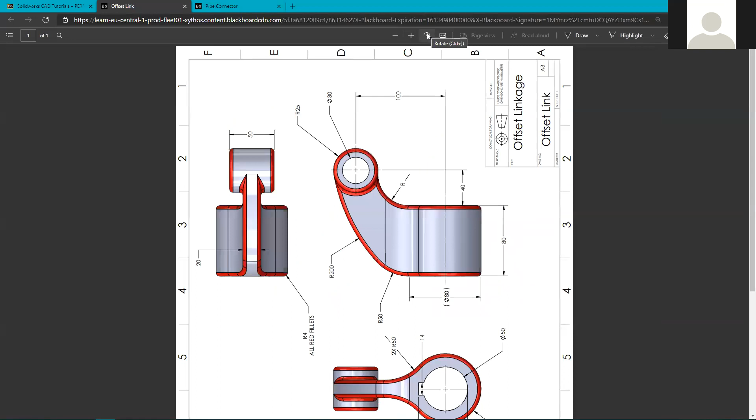So what that will include is coming up with our own specific title block as well. So you can see down here, we've got the title block of this drawing. This is a non-standard title block. It just contains the information that we're particularly interested in for this drawing. So the way that that gets created is you load in one of the SolidWorks standard title blocks and then you modify that and adapt it to your own purposes.

So that's a good skill to be able to have, because you don't want to be locked into just using the standard SolidWorks formats all the time. Sometimes the title blocks that you get in the SolidWorks standard sheets are way too big and they take up a lot of space on your sheet that can be used for drawing views and annotations and things like that. The second part that we're going to tackle, I haven't actually adjusted the title block on this one.

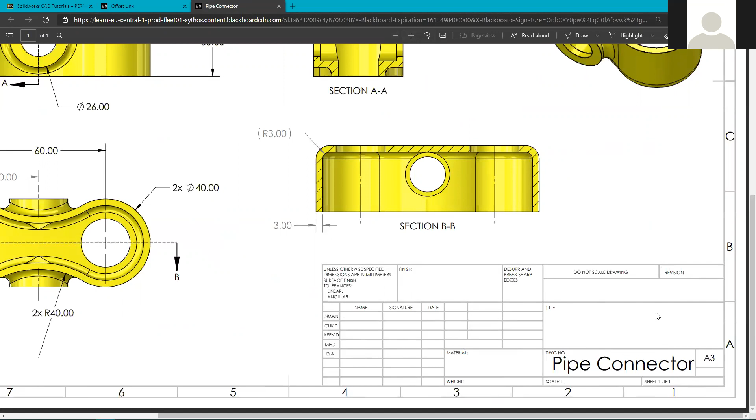So I believe this one, keep clicking on rotate there, sorry. I believe this one is just the ANSI standard title block. So you can see that title block on that drawing that we were just looking at before is a modified, cut down version of this with a few additions as well. So we'll look at how to modify the actual sheet formats themselves, which includes the title blocks, and then we'll practice laying out drawing views.

I think we did a little bit of this when we did the valve revolved part, but it's always worth having a bit of a practice on some different parts because you encounter different problems depending on what the part is that you're creating the drawing of. So yeah, that's the plan, to do a bare minimum of those two. If we rush through those really quickly, I think what we'll tackle is a simple assembly drawing. So you can see this is just a simple 3-part assembly. It's got a bill of materials that gets auto-generated by SolidWorks there.

Again, there's some customization to the actual title block that's gone on there, and various types of views. There's an assembly section view there. Obviously, that shaded view on the left there is an exploded assembly view, which is a specific type of view that you can only use in assemblies. And then we've got things like detailed views and standard projections and things like that.

So yeah, if we get through these first two, I think we'll tackle that one. And even if we don't, we'll probably tackle that one next week. And then I think we'll lead into having a little look at simulation in SolidWorks next week. So that's the plan.

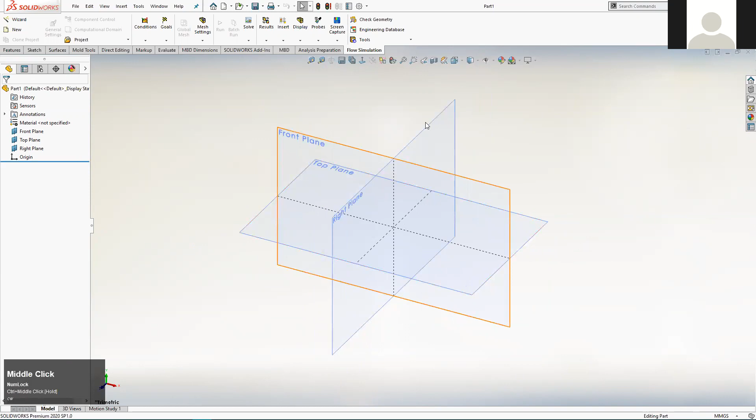So I'm not really going to go through, if you can't see the base planes, how do you show the base planes? We do that every week. So it's generally in that hide and show items. So yeah, we've covered that a few times. So I'm going to assume that you can see your base planes before we begin.

So I said we're going to use the extruded boss base feature to create this lower tube. The only thing that I haven't told you yet is what plane we are going to use. So you have to make as sensible a choice as possible as to what plane is where in terms of our part, and there is no right and wrong answer.

But in my mind, this I'm regarding as the front of the part. So when I'm looking at it from this sort of angle, I'm going to regard that as looking at the front of the part. So I'm going to create my circular sketch to create my tube on the front plane. So again, there's no real right and wrong to that. You've just got to make a choice, and that's the one that we're going to use.

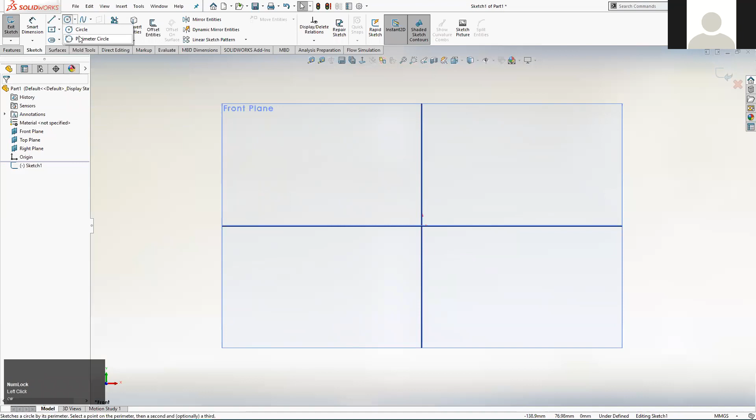So extruded boss base, the system asks you what plane you want to create your sketch on: front plane. And all I'm going to sketch are two circles, and I'm going to center them both on the origin point. So we want to use the center circle tool. There are two different types of circle tool in there, but it's the center point circle that we're using.

And then I'm going to hover over the origin until I see that yellow coincident icon appear, which means the system is going to lock that first point onto the origin point, which is what I want. And then I'm just going to drag it out. I'm not too concerned by the size of this, so I'll drop it about there, and then I'll do the same again for the slightly smaller circle. So make sure the center locks itself onto the origin and click, drag it outwards, and then click again. Then we don't need the circle tool anymore, so you can press escape.

We're going to add some dimensions to it, so we're going to use the smart dimension tool, and I'll do the first circle first. It may seem to make no difference at all, but when you apply this diameter dimension to the outside circle, you can see, as I'm dragging this dimension around, there are various versions of it that the system is offering me. There's an angular one, a horizontal one, and a vertical one. For reasons that will become clear later on, I recommend you insert a diagonal or angled one like that. It's just a quirk of the system.

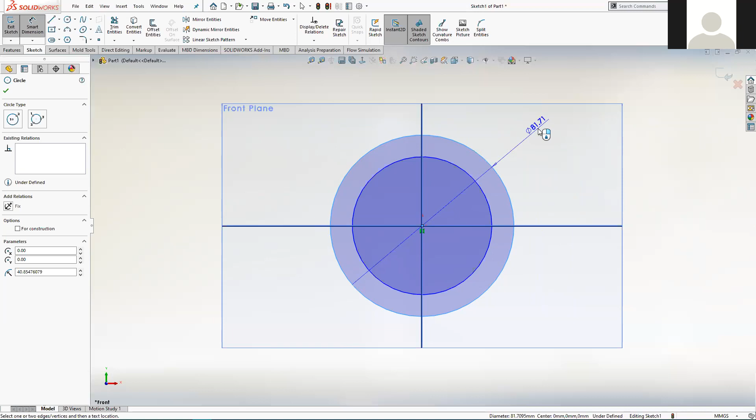So we'll drop that dimension and set it at what it needs to be, which is 80 millimeters. And then we'll do the same again for the inner one. And again, don't let it lock itself to vertical or horizontal. Drag it into a position where it goes into that angle dimension mode like that. And the inner one is 50.

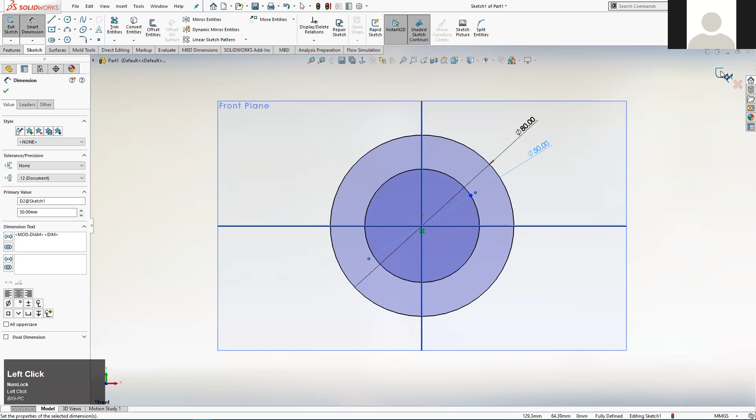So we've got the closed sketch that we need for the larger of the two tubes. It's shaded it in, which is actually a bit misleading because it's shaded in the center as well, and we know that little center section is going to be hollow. But we're happy with that. It is fully defined, and we're happy that it's going to fill in the gap between the two circles with material, not fill in the center. So we can OK that sketch.

And we get our preview of what the extrude's going to look like. If you want to rotate around to see which direction it's going away from the plane, that's advisable at this stage to figure out whether you're happy with that.

I've already made these choices in my head as to how our part is positioned relative to the base planes, and that this 80 millimeter depth for this extrude goes into the negative side of the front plane. Currently it's on the positive side, and if you want to figure out which side is which, look at the bottom left tri-axis readout, which should always be there. The arrows point in the positive direction, so we're going positive Z at the moment with this extrude.

I'd made the choice in my head that I wanted the front plane positioned on my part there, on that vertical face, so I'm going to have to flip the direction of this extrude to achieve that. Again, that's not a right or wrong decision, you've just got to decide these things. I made that choice when I was looking at the drawing, so I'm going to flip, or reverse, the direction of that extrude, using the correct SolidWorks term.

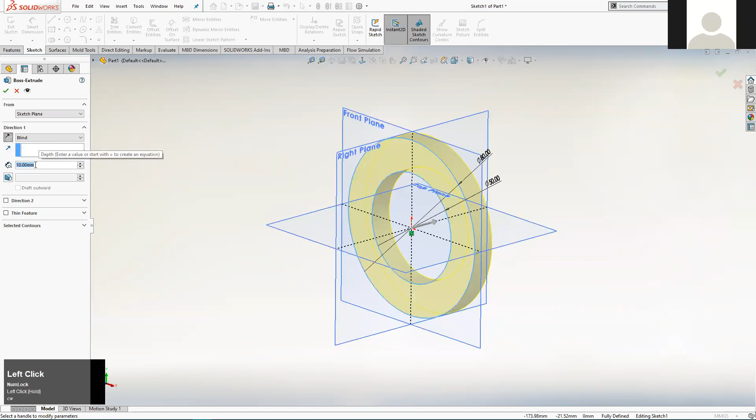Then I'm going to set the amount of extrude, the depth, which we just saw was 80 mil. That looks okay, I'm happy with that, so I'm going to click the green tick to OK it. So I've got my first feature, the lower tube, the bigger of the two tubes.

Now we're going to tackle that upper one, the slightly smaller one. Looking back at the reference material, you can see the upper one is at 90 degrees to the lower one, so we're going to have to create the sketch on a different plane.

Given that the front plane is now sat up against that front face, the leftmost face on the lower tube, we're going to have to sketch this one on the right plane. More than that, if we look down from above onto the part, the upper one is centered around the center line of the lower one, so it must be a mid-plane extrude.

So when we come to actually create this upper extrude, once we've created the sketch, we've got to remember it's going to be a mid-plane extrude. So let's do that: extrude boss base, which plane? The right plane, which you can see there.

It doesn't matter that the right plane doesn't extend up to the point in space that we want to sketch. The right plane, and all the planes, are essentially infinitely large, so you can sketch anywhere on that plane. That boundary edge is just for tidiness, to tidy up the display of your part so the planes don't go off into infinity in every direction.

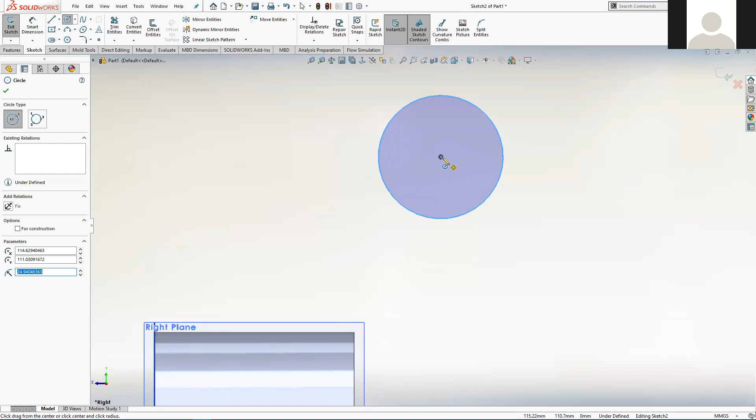So the first circle, we just roughly sketch that in, and then the second one we want to lock its center point to the center point of the first one. When you hover over the center point of the first circle, you get that concentric relation popping up in yellow, and when you get that, you want to click. Now the center points are locked together, and then click again to drop the size of the second circle.

Then we'll add some dimensions to these, so smart dimension again. We'll do the outer one first. I'm making sure my diameter dimension is a true diameter by holding it on a diagonal, not letting it lock itself to vertical or horizontal, making sure it's on an angle so I know it's a true diameter.

This one is going to be 50, and the inner one is going to be 30, like that.

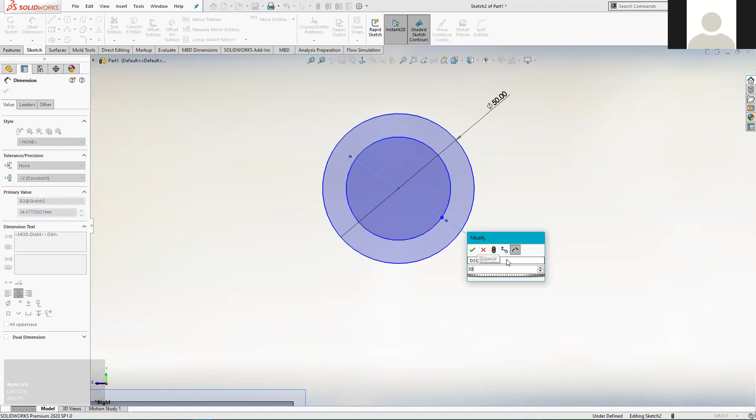So we will position the horizontal and vertical position of these two now, because you can see they're both still fully blue. So they both have degrees of freedom that mean they can just slide around in this sketch horizontally and vertically. So we're going to put some dimensions in that will position them relative to this lower tube.

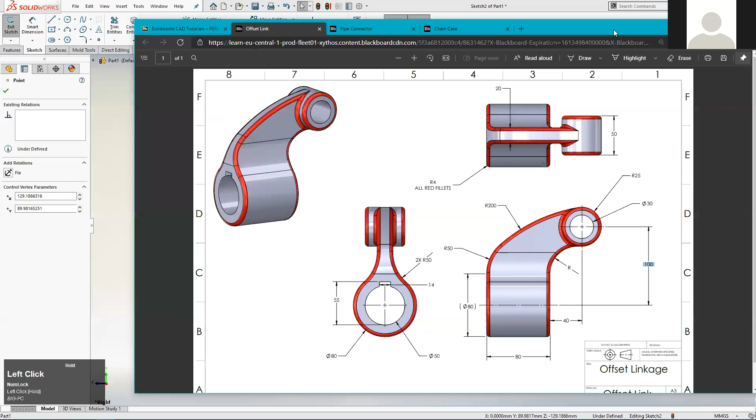If we just go back and have a look at the dimensions we're about to put in: there's a 40 there, from the rightmost face on that lower tube, that's 40 horizontally. And then there's 100 as well, which in the drawing comes up from the center axis, or center line, of the lower tube. Now because of the way we've created that lower tube, that center line happens to be coincident with that plane there.

So that's quite good, because we can reference that plane with our smart dimension that we're about to create. So: smart dimension tool, click on the plane, click on the center point of our two circles, and then place the dimension so it's as legible as possible. And that one wants to be 100.

Then we'll do the same again, but for the horizontal dimension. This time we're referencing this vertical, rightmost edge on the lower tube. So that edge there - click on that, and then click on the center point of the two circles again. And then one final click just to place the dimension. And that should be 40 mil.

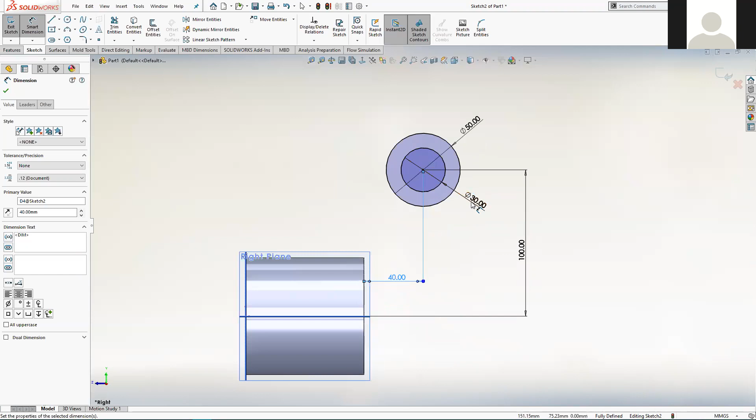So at that point, we've fully defined the sketch. It is a closed boundary. So we're happy, but we're not quite going to exit yet. The reason is that because of the way we're going to make the drawings, when we come to replicate this drawing, we're going to try and import as many of these dimensions into the drawing as possible. Rather than create them ourselves while laying out this drawing, we're going to tell the system to just import them straight out of the part itself.

So straight out of the sketches that went into creating the part. And you can see that dimension I've highlighted is not displayed as a diameter. It doesn't have that diameter symbol like this one, the 30. It's actually displayed as a radius, which is a perfectly valid way of doing it.

But the one that we've put on our sketch, if we get our sketch back, is displayed as a diameter. The way you change that is to right click on it, and one of the options is display as radius, which mine hasn't updated. Let me try that again. Right click, and now you have to find that option - it's down here under display options, display as radius. So you might have to try that a couple of times as well.

I ran this the other day, or a similar drawing, and it worked. Then I ran it the day before, and it didn't work. So yeah, mine's working now, but you may have to try maybe twice just to get the system to change that.

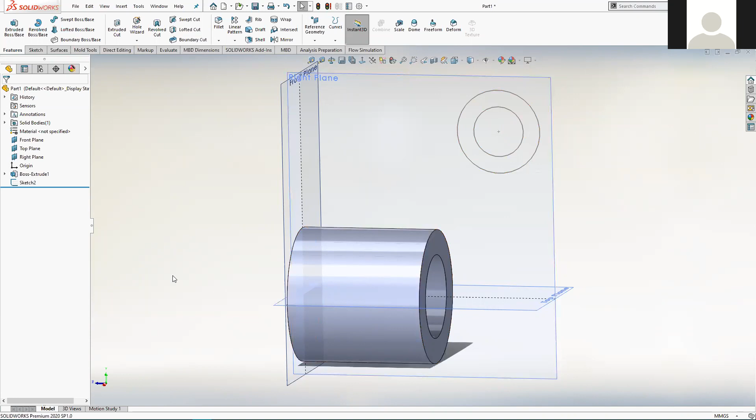So we're happy with that sketch now. We can exit the sketch, so okay the sketch. Because I temporarily quit out of the feature there, I'm not confronted with the extrude boss dialog now. Hopefully you didn't have to quit out - I quit out because my system wasn't updating that diameter value to a radius. So what I'm going to do now is quickly jump back into the extrude feature. Hopefully this is what you're seeing, something like that.

As I say, that's what happens if you cancel a feature - the system keeps the sketch you've just created, but it cancels the feature. So you don't drop into this feature creation dialog on the left hand side, you just exit the sketch you're in, and the sketch appears in the feature manager as an orphaned sketch, you'd sort of call it. But anyway, I've gone back into the Boss Extrude feature. It's accepted that sketch as valid input to create this feature from. It's not a mid-plane feature, so I'm going to change that straight away - from blind to mid-plane.

It looks a little bit too wide, so that depth needs to be changed to 50. Then again, it's probably wise to have a quick look at it to see whether it looks correct. Yeah, it looks like it's in the center of the lower tube in terms of its orientation. So I'm happy with that. I'll click on the green tick.

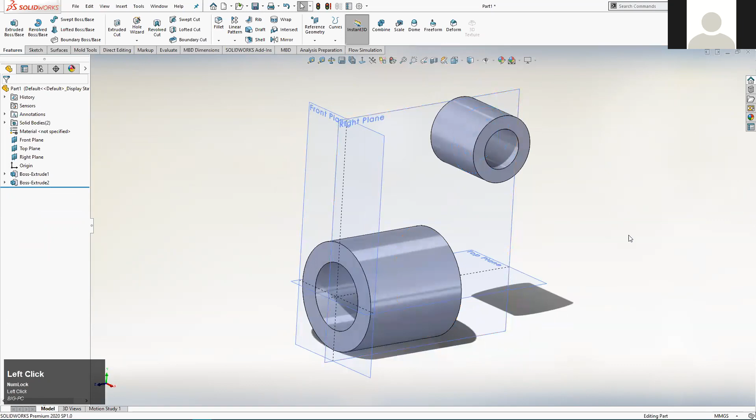So we've got the important bits of this linkage - the bits that are going to interface with the rest of the assembly that this thing is undoubtedly going to be used in. There'll be a shaft of some kind that sits in there and joins that end of the link to the rest of the machine. And then there'll be another shaft that sits in this lower link that has a keyway cut into it that somehow joins it to the rest of the machine in this direction. So these are important pieces of this design.

The bit we're going to do now is the joining section in between them - the bulk of material that makes sure this end doesn't move relative to this end, or doesn't move much, let's say. There will always be a little bit of flex in there, no matter how you design it or what material you build it out of.

So referring back to the drawing, this rib or piece of material that's going to join these two together is centered around the same plane that this upper tube was just created around. We created that extrude on the right hand plane and just used the mid plane extrude for it. So we're going to do the same thing for this joining shape. That's the plane we're going to create it on, and it's just going to be an extrude again - an extruded boss base.

But what form is the sketch going to take? It's this view down at the bottom right that we're going to have to look at. Essentially, I interpret that view and those particular dimensions as pointing at this shape. So there they are - there's a radius 200 and a radius 50, and then there's an odd one down there that's just a radius, it doesn't define what the radius is.

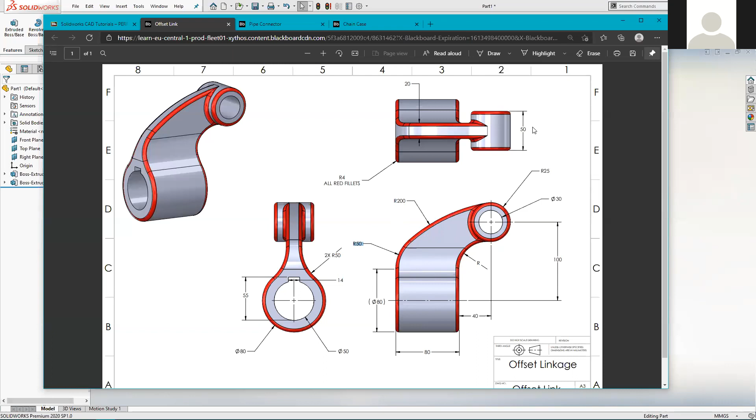And then we'll tackle this lower one after we've done that. So let's do all that now. It's going to be an extruded boss base again, so we'll select that - it's going to be on the right plane. And again, I'm sure we covered this last week.

My system is now auto-rotating my view round every time I create a sketch. I'm sure we went through that the other week, how to switch that behavior on. But if you're not seeing that behavior on your system, then you have to manually, each time you create a sketch, go into that menu there and do a normal to. Or for the eagle-eyed people, you can see there the shortcut is the control key and number 8. But they're a decent distance away from each other, so it can be a bit tricky to hit that. So back to the sketch.

The first thing I'm going to do is hide the planes because they're obscuring something that I want to click on. The thing that I want to click on is the point here where the top edge of that tube meets the vertical edge of the tube, and I can't actually click on the point because the system thinks I'm trying to click on that plane instead. So I'm just going to hide all features that aren't solid blocks of material. I just click on the eye at the top there and it hides everything.

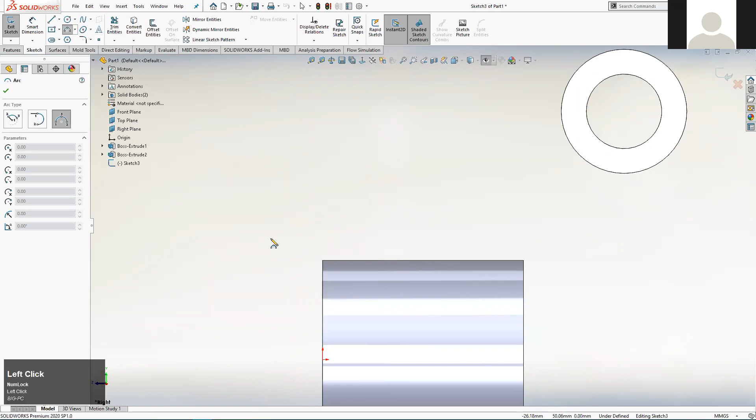Then I'm going to get my arc tool. The specific arc tool that we're going to use is the 3-point arc. If you've not got that selected at the moment, it's in that drop-down menu next to the arc tool. And then I'm going to let the system lock one end of this first arc onto that point that I was just talking about. The point where those two edges meet highlights in orange when you go near it. So I'm going to click there.

I'm going to make this first arc about that sort of scale relative to the rest of my part. And then I don't want to put a huge amount of curvature upwards in it. I just want to ensure that it's not convex, so it's not sagging like that. I want it curving upwards slightly. But as I say, I don't want it too curved like that. I just want to put a subtle upwards curve in it. Something like that will do fine.

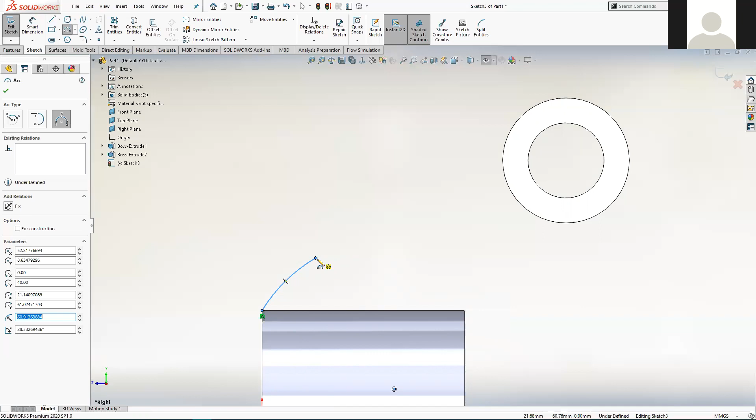And then, because I've still got the arc tool selected, my next click is going to begin sketching the second arc. I want to lock the first point of this second arc onto the end of that first one. So again, when I go near the first one, I get that coincident relation showing up in yellow. When I get that, I click. And now the first point of this bigger arc is joined onto the end of that first arc that I created.

And then the other end of this larger arc, I just want to add a relation between it and the edge of that upper tube. You can see when I go near the edge of that upper tube, the compass points are shown. So north and south and east and west on that tube are shown. I don't want to stick the end of this arc onto any one of those specific points. I just want to lock it somewhere on the edge of that upper tube. So there will be just fine where I've got it at the moment.

And then again, I just want to put a little bit of upwards curvature in it, because eventually it will have upwards curvature. It won't be curved in a downward sense. So I just want to put a little bit in it. That's good enough for now. Then I'm not going to sketch any more arcs, at least for a little while. So I'm going to hit the escape key to get out of the arc tool. And if you hit the escape key again, it deselects this upper arc. You can see it's highlighted in a pale blue at the moment, which means I've still got it selected. So if I hit escape again, it deselects everything.

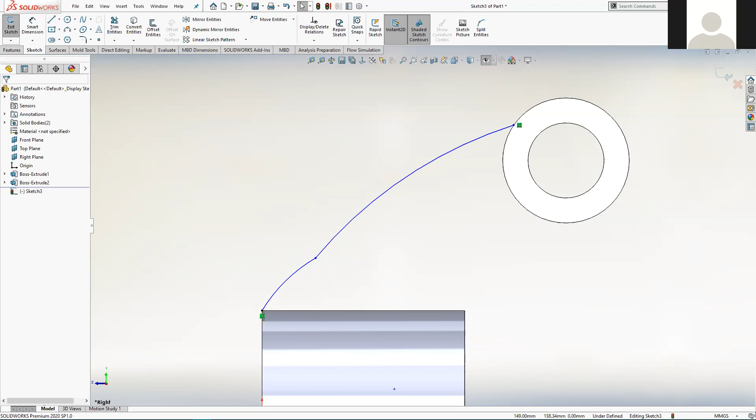And then what I'm going to do is try and drag the positions of the ends of these arcs approximately into the final position that they're going to end up in. For this, you need to have one eye on what you're aiming for. So what I'm going to try and do here is lock this window so that it stays on top.

And then this lower one, there's no option for dragging the point on that because it's locked itself in position. But what I can do is I can drag the meeting point of these two. And you can see as I move that around, there's a little X mark that is rising up through that lower tube. And I know that when this lower arc is correctly positioned and dimensioned, that is the arc center point. We've said this arc is a portion of a circle, all circles have a center point, so that is the arc center point for this lower arc. You can see it moving up and down.

I know that when this arc gets locked in position, that center point should be approximately on that horizontal edge of that lower tube. So where I've got it there is approximately right. So I'm going to just let go there. So I'm reasonably happy with that now.

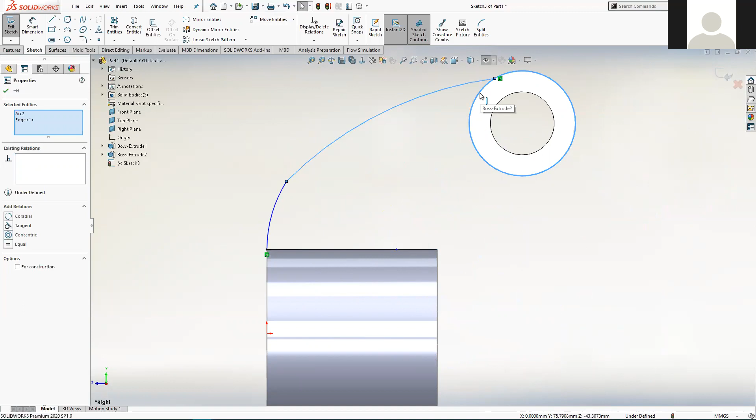So sometimes when you're adding relations to a sketch or you add a dimension, you can end up in situations like this or similar to this. And it becomes difficult to get back to where you were then. Now, luckily, we've always got the undo key. But this is why I was trying to drag these points so that they approximated the final positions that this sketch needed to be in. And hopefully what that will mean is as we add the tangent relations in now, the sketch shouldn't turn itself inside out or upside down or all those crazy things that we don't want. So let's add these tangency relations in.

So let's put one between the two curves first. So I'm going to click on the upper curve. Just make sure that you don't end up clicking on the exact center point of the curve or the exact midpoint there. You can see it just appearing underneath my point. That's not what you want to select. You just want to select the curve itself.

So select the curve, hold down the control key, select the lower curve, and again, don't be tricked into clicking on that dead center point. That's not what you want. You just want to click on the curve itself, and then we can add a tangency between them. So there's a tangent relation icon there. Yeah, that looks okay. It didn't pull the sketch inside out.

Let's put one on the lower curve. So we'll click on the lower curve again, get that selected, hold down control, and select that vertical edge there. And then tangent. And you can see it barely moved because I took the time to drag that curve into position so its center point was coincident with that top edge.

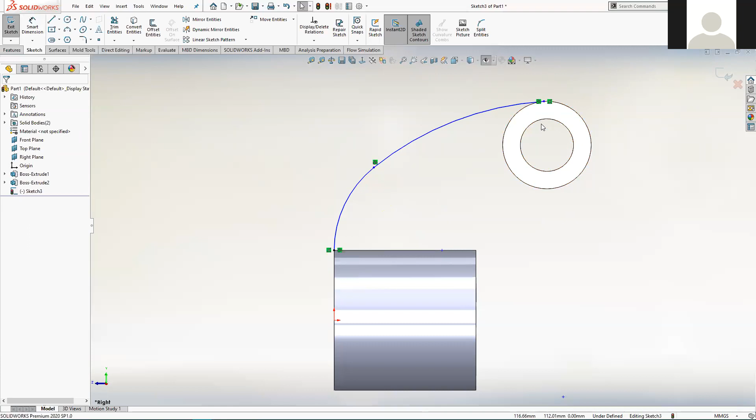Now what we're going to do is put the smart dimensions on. Just in case anyone's sketches have turned inside out, I'll just try and break mine on purpose. Yeah, something like that may have occurred on yours, which, to give the system its dues, it's still satisfying all the relations that we've put in there. So that lower curve still ends at vertical, so it's still tangent with that edge there. These two are still tangent to each other where they run into each other. There's no discernible notch or difference in their angle. They just run smoothly into one another. And again, that tangency between the end of the big curve and that upper tube is still maintained.

So the system's not broken any of our rules that we've given it there, but it has come up with a shape that is of no use to us whatsoever. So yeah, just be aware that that sort of thing can happen when you're setting up these slightly more complicated sketches, let's call them. But anyway, if you do get into that problem, click on undo to get back to a more sensible sketch and try and drag it into position before you put the relations on it.

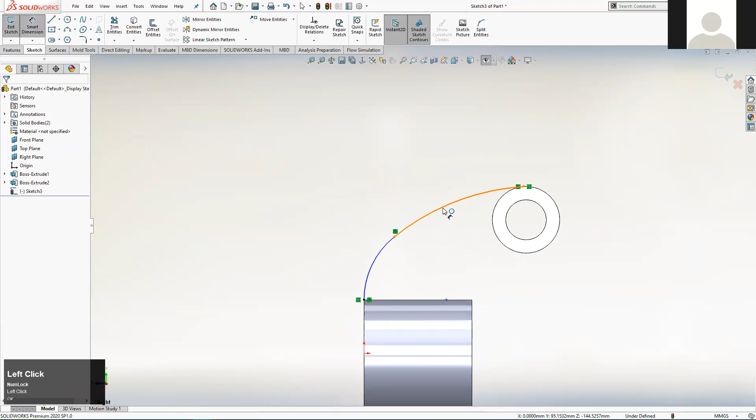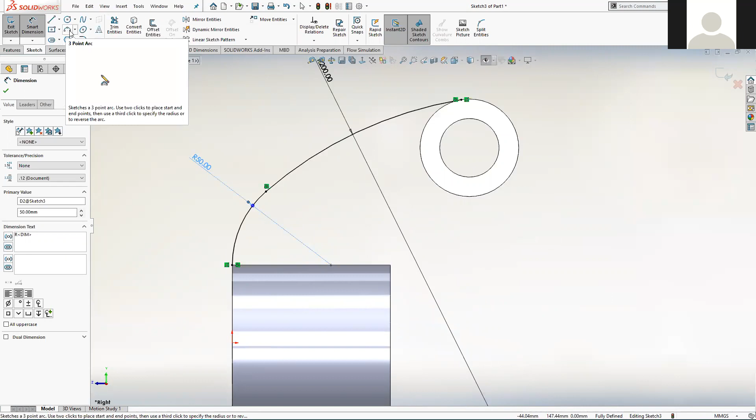So it's a single arc this time. So we'll get the 3-point arc tool back. We'll lock the first point there onto that point on the lower tube that's highest point and rightmost point. There. We'll drop the second point so it just locks itself onto the edge of the upper tube. Again, we don't want to hit a specific point of any importance. We don't want to hit south there on the compass face. We just want to stick it to the edge like that.

And again, we'll give it a curve in the right direction. So we know it curves upwards, so we'll give it a little bit of curvature in the correct direction like that. Then I'll hit escape twice just to get out of the curve tool and deselect the actual curve itself. And then I think I'll just add the tangencies in. So click on the curve to select it, hold down Control, click on the edge of the upper tube, make them tangent to each other.

And again, if you sort of wiggle your mouse around, that menu disappears, but all the relation icons are available on the leftmost menu as well. So that menu that pops up is just to make your life a little bit easier, just to speed up your modeling process slightly.

So now I'll select this vertical edge. So I'll click on that, hold down Control, and then select the curve again. Do the same thing, add a tangency, and then you can see it has turned black. So the system doesn't need any more input from us. There's no need to dimension this. And if you do try and dimension it, so I'm going to try and put a dimension on it anyway, the system will inform you that this dimension is not required, basically.

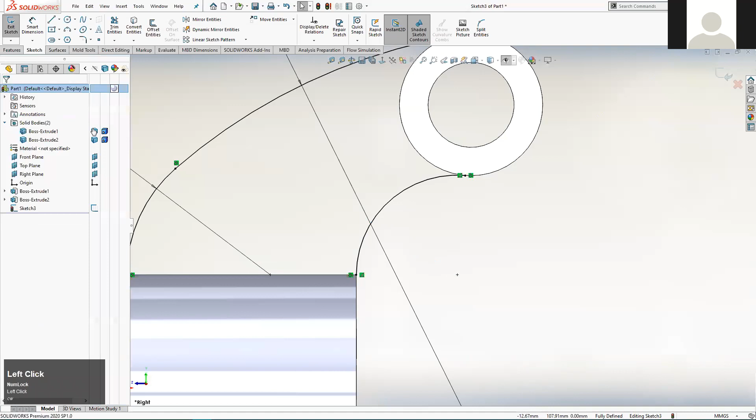So we've got 2 things to finish off in this sketch. Currently it's an open sketch, so I'll prove that now just by temporarily hiding all the solid bits of geometry that we've already created. So you can see there's a big hole at the top here, so the boundary doesn't get closed off at the top, and likewise at the bottom there, the boundary doesn't get closed off. So we need to address those 2 issues.

And I think, given that we've not used this tool, we'll use the Convert Entities tool. At least I think we've not used it, but it's good to just make you aware that it's there and what it actually does. So with this tool, we'll pre-select the tool by clicking on the icon, and then it's waiting for some input, and it tells you, if you hover over the box, what it's waiting for, saying select faces or edges or sketch entities to convert.

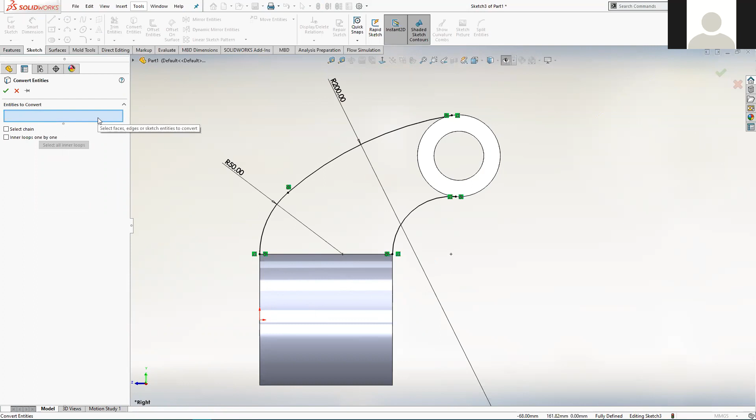Now what that means is we can click on areas of our existing model. So let's say this top edge of the lower tube, or this front edge of the lower tube, or that circular edge of the upper tube, and we take a copy of them and we copy them into the current sketch. So I'm going to click on the edge of that upper tube and then click on the green tick over there to OK. And what you can see, although it's not immediately obvious, is we've taken a copy of that upper edge. So we've grabbed a copy of it and put it in the current sketch.

Now there's too much geometry there. All of this side of the circle we don't require. We just want this side of the circle to complete our sketch. So I think we have used the trim tool before in other sketches. But if we haven't, and it's new information, that's the trim tool in the sketch toolbar, and as my little animation's showing you there, it allows you to just freehand draw a grey line through any geometry that you don't want. So that's what that little animation is showing.

You hold down the mouse button, and you just drag a freehand line through any other line in your sketch that you want to trim. And the way that the trim works is it trims that line back to its nearest neighboring line. So that's what we're going to do.

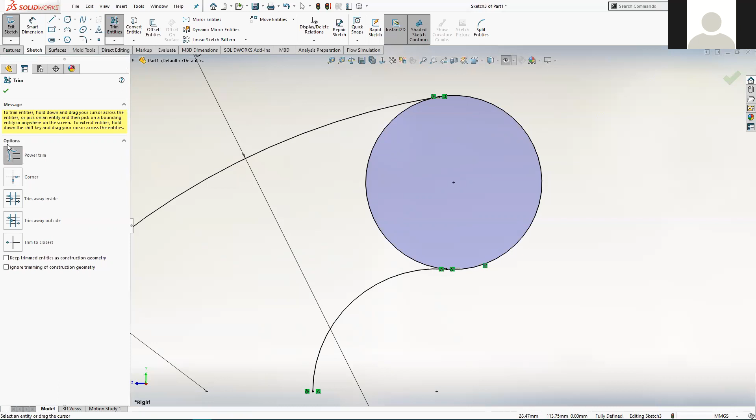So click on the trim entities. The type of trim, because there's a few different types, is the power trim. And this is kind of the one that we're going to use a lot when we use this tool. But luckily, it's the one that the system defaults to, the power trim.

So I'll create some wiggly shapes here just to show you that I'm holding the mouse button down and I'm just dragging this around, and then I'm going to hit the edge of this circle and watch what happens there. And then it gets trimmed back, and the trimming stops when it meets its nearest neighboring line, which is this arc up here and this arc down here.

So that's the top bit done. We've closed off that end of the sketch. Now we've got to close off the bottom of the sketch. So I don't need the trim tool anymore, so I'm just going to click on the green tick to get out of the trim tool. And then I've temporarily hidden my solid tubes that I've created. You don't have to do that, but that was just to illustrate that this sketch was still open.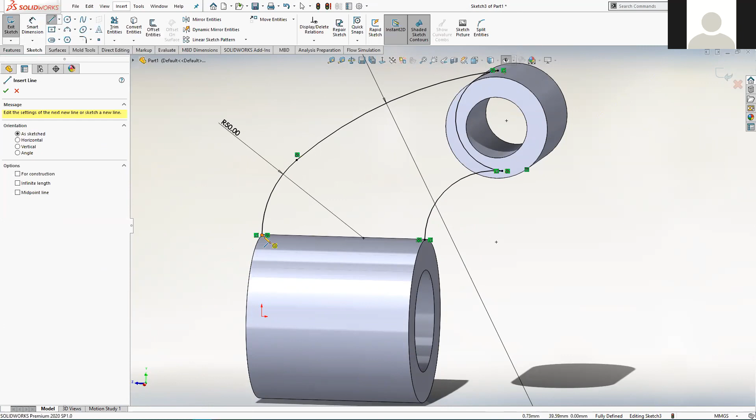So if we create an extrude and we just close off our sketch with a straight line there, there'll be a problem in that our extrude, well, let's do that first and we'll look at the problem. So let's get the line tool and just draw a simple line between that arc and that arc. And then we get our closed boundary shape and everything looks fine.

So we then say we're happy with that sketch. So we exit the sketch. Then we get our preview. We change it to a mid-plane extrude. We'd give it the correct width, which, if I can find it, 20 mil is the correct width that we need. And then OK that feature, and then we'll investigate what's gone wrong.

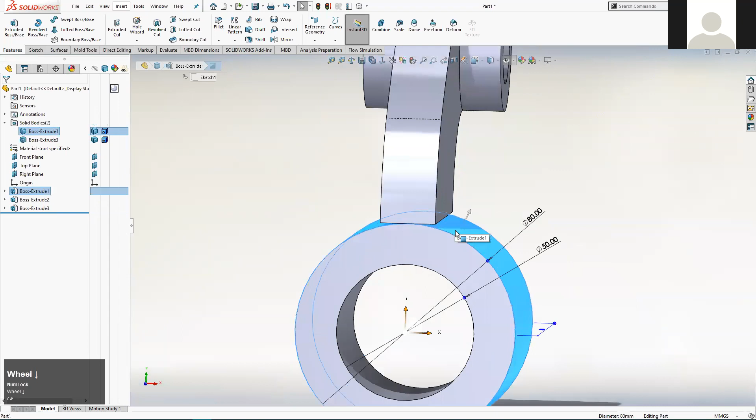So we can see there, because we're doing a simple extrude on a mid-plane, but it's trying to join itself onto a tube shape. As the tube drops away, because it's got a circular cross-section, our extrude feature doesn't drop with it. It just extrudes outwards from a central plane, which was that right-hand plane that we created the sketch on. So there's a problem there.

We're going to have to go back into that sketch and extend that bottom edge down into the tube a little bit more, so that when we create that extrude, it doesn't leave this missing wedge of material where the two don't touch each other, essentially. So yeah, let's do that. This is all good practice for going back into sketches that we've previously created. So we know the sketch is inside that final extrude feature there.

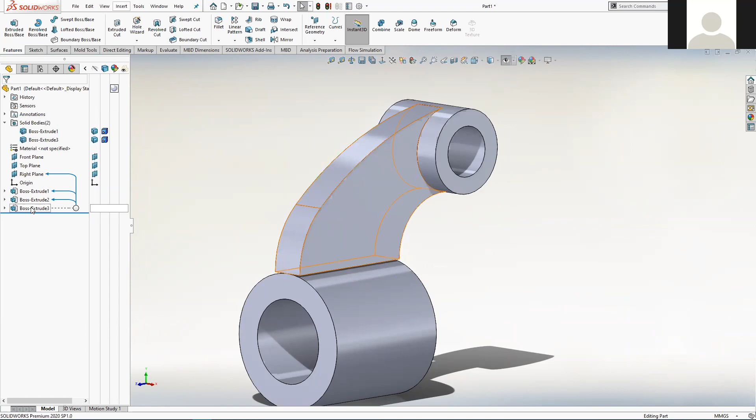So if we just select the extrude feature and click on the edit sketch icon there, don't make the mistake of editing the feature. If you edit the feature itself, you'll be in that menu where you can set the depth of the extrude and the direction of the extrude. We don't want to do that. We want to edit the sketch that was created first, that's inside this feature.

So edit sketch. I'm going to delete that bottom line. So press delete on there. And then I'm going to have to extend downwards, so down this edge to a certain depth, and then create a much lower horizontal line, and then create another vertical new line that goes up and meets that point there.

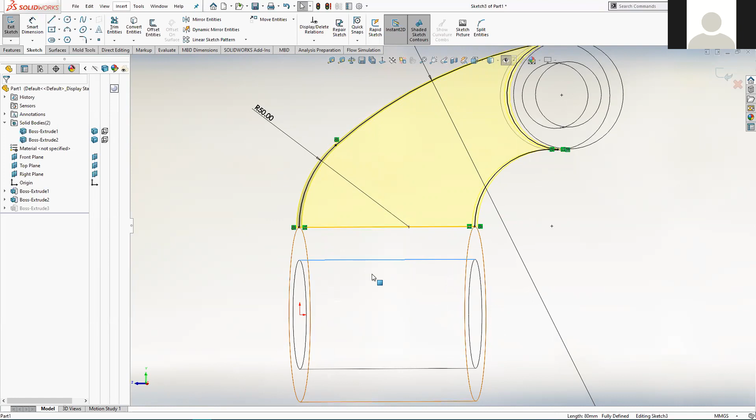So a valid question is, well, how deep into the part should we make this extra geometry? And I think the easiest way to do this is to go as deep as the inner wall of the tube. So that line there represents the inner wall of the actual tube shape itself. So we know if we go that deep, we'll always create enough overlap so that this feature and this lower tube feature will weld themselves together into a single block of material. So that's what we're going to do.

So I just changed my display style there to be, just let me get back to normal to the sketch. It's not allowing me to do it.

Right hand plane, normal to, please. Oh, I've got the normal to icon right there. Right, so that's what I'm seeing. And it's because I've turned my display style to wireframe, so you can see the system's no longer shading in these tubes, it's just highlighting where the edges are.

So the way I did that is inside that icon there. If you click on that, all the different display styles are in there, and I've switched mine to the sort of transparent version, the wireframe version at the bottom.

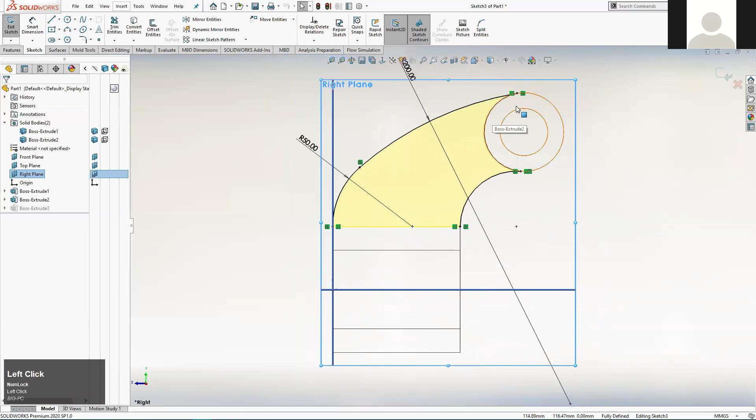And it should be as easy as just getting the line tool and sketching 3 lines here. So from the end of that curve down to that inner face, and again the system's offering me that coincident relation, so I know it's got to that inner face. So click there, horizontally along that inner face till I get to this plane back here, and then back up to meet my original sketch shape.

And then it should shade the boundary in again, so I know that I've created a closed boundary. And this time, I know that the overlap's going to be enough between this feature that we're creating now and that original tube feature that the system is going to kind of weld the two of them into a unified block of material. So it's going to regard them as one single block of material, which is what I want.

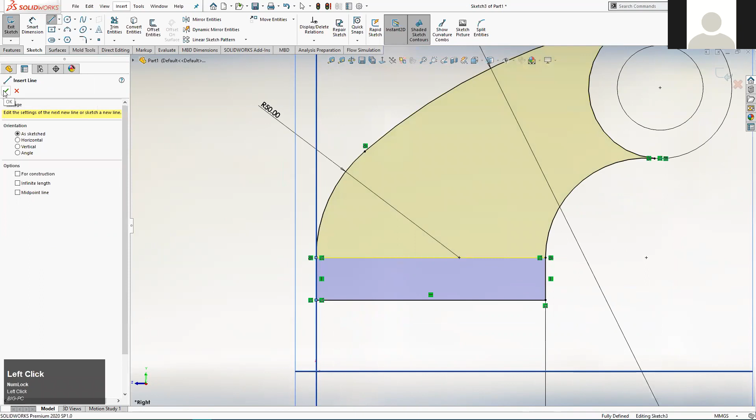So I can OK the line tool, probably twice just to get out of it, and then OK the entire sketch just in the normal way, just with the blue exit sketch icon at the top left there.

And then because I don't want to work in wireframe for the whole part, I'm going to turn my display style back to shaded with edges again.

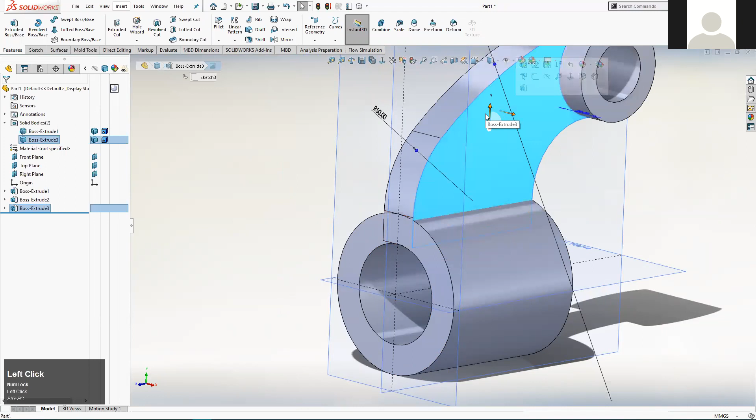And then what I'm going to notice is, because I temporarily created 2 blocks of material, so when we had that wedge shape visible there, this new extrude that we were creating didn't actually touch that lower tube at all. It may have appeared as if it touched just slightly at the topmost extent of the tube, but it didn't. The two never overlapped each other.

So the system set an option in here that would mean that this was always kept separate from the lower tube. And the reason I know that this is the case is that as I rotate around this, you can see there's a little bit of graphical corruption, let's call it, where that face is actually occupying the same space as that face. And you can see the two are kind of fighting for supremacy there.

So when I rotate round, that lower face of that piece of geometry that we just created is trying to break through the end face of this tube. And that indicates to me that the system hasn't unified these two into a single piece of geometry. It's keeping this one separate from this one.

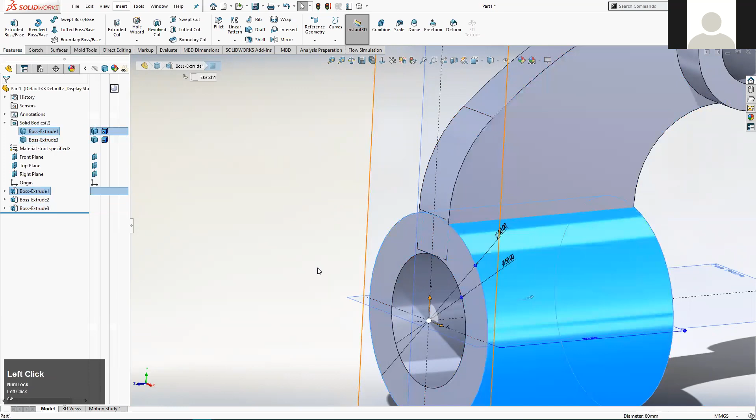And if you ever get into that sort of situation in SolidWorks, you can check. So what I'm saying is basically I suspect that there are 2 solid bodies in this part. And the way that you investigate that is you go over to the feature manager, and if the folder that says solid bodies on it has got anything above a number 1, then you know that that's how many different bodies there are in your part.

And what you can do is you can sort of drill down into that and have a look what bodies are in there. And if I select this one, it highlights what's included in that body. And if I select this one, it highlights what's included in that body.

Now we will come to multi-body parts later on, not today, but later on in the course, because it's sort of a concept that we can use to our advantage. But in this case, we intend for this part to be made out of a single piece of material. There should be no distinction between these two. So we need to correct this, is the bottom line.

And it's an option in this extrude that we've just created that got switched on automatically by the system, and we've got to correct that now.

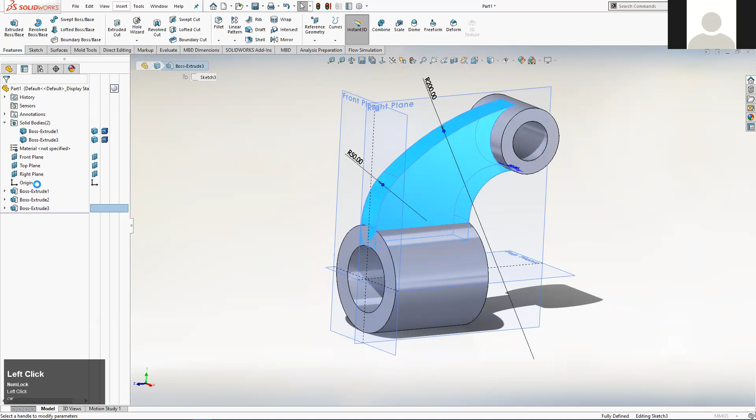So the upshot of all that is we're going to have to go back into that extrude feature and edit the feature this time. So click on the extrude feature icon in the feature manager. We're editing something about the feature, not something about the sketch inside it. So for feature, the two key options are: we want this option ticked, which it is already, merge result.

What that means is whatever material gets created in this feature gets merged with all the other solid material we've already created in the previous features. So that's good that that's ticked. But down here, where it says feature scope, it's only currently got this upper tube selected. We could click on the lower tube and it will get added in, or we can just switch it to all, meaning anything this feature touches gets merged with it. So all just encompasses everything.

So once we've set those options, ticked OK, we get a rebuild, and you can see these two are no longer two distinct pieces of separate material. The system's essentially unified them into a single block of material that also includes the upper tube. So we've corrected that. Let's keep going.

I think we'll do an easy feature now. We'll just put that big fillet feature on that edge there, which I'm sure we did a little bit of before. The easiest way to initiate a fillet feature is just to click on an edge of the model itself. So the fillet is available up in the features toolbar, but by far the easiest way to get into that tool is just to click on an edge you want to apply it to. The quick access toolbar appears and the fillet icon is in that toolbar.

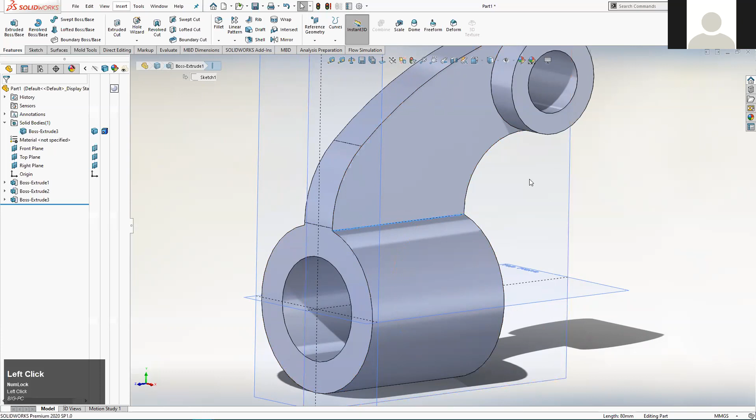Then you get a preview, and I think we'll up the size to what it says on the drawing, which is 50. That preview still looks good. I'll rotate round and select that matching edge from the other side of the model, like that. Again, if you're not seeing what I'm seeing, two fillets previewed in yellow, you might have partial preview selected, which only previews one out of the multiple ones you've applied. Full preview shows you a full preview.

That looks good, so we'll accept that. Then I think we'll apply those much smaller fillets, which on our drawing are all coloured in red. These are all going to be a radius of 4. So we're going to select multiple edges this time, but I'll initiate the feature by just clicking on the edge of that tube there.

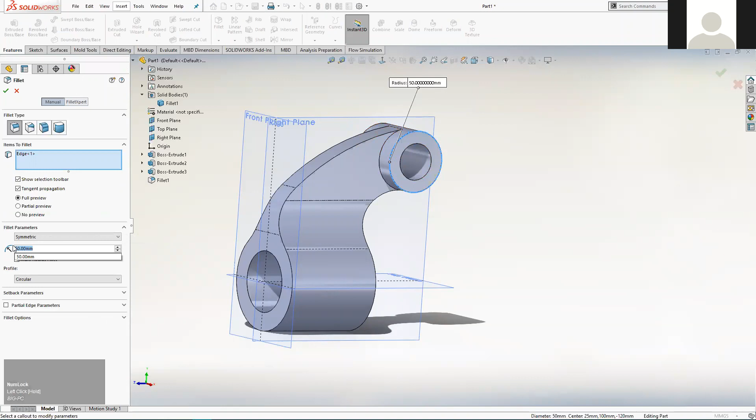So click on there, apply another fillet feature. You won't get a preview because it's still huge, still set at 50, which can't be applied to that edge because the edge isn't big enough. So we'll change the size to 4. Then it's just a case of going around the model and methodically applying this fillet to all the edges that require it.

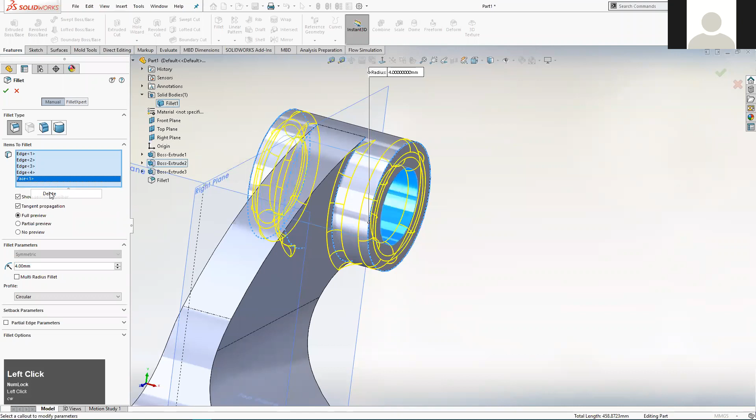So that little internal edge there needs it as well. Then, since we've got those two, we could do their matching counterparts from the other side of the part. If we rotate around, we get the matching ones on that side too. Again, if you click in error on something, like that face there, you can either click on it a second time to remove it, or find it in the highlighted blue entry box and right click to say delete. Either option will get rid of it.

Now I'm going to click on the upper curve of that spine shape we've created. When I do that, you can see what happens: that fillet, because all these edges are tangent to each other, they have tangency relations, so when one edge meets its neighbour there's no nasty notch or peak between them. One edge runs into the next perfectly tangent to it. Because I've got this option on by default, clicking it on and off now, what it does is if there are edges tangent to the current edge, it will just run all the way around them. That's the default, which is arguably the most useful way to set it up.

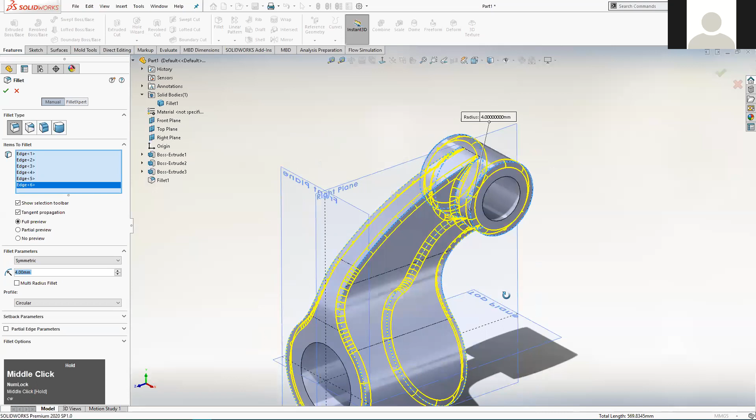So I'll click on the lower edge of that spine shape as well, and I think we've got them all at that point. Yeah, okay, that one. Then, since we're tackling that fillet, it might be worth applying that specific red highlight colour just to the fillet feature itself.

So the way that you would do that is if you select the fillet in the feature manager on the left, or select any feature that you want to change the color of just that feature, and it's this icon here. So if we click on appearances, then we get the option. The system's saying here is this new color that you're about to set, do you want to apply it to the fillet itself, or to the entire solid body?

We've already said we have a single solid body now. We did have two before we corrected that problem. So that would apply it to the full part in this case, or do you want to apply it to the part as a whole? In this case, we want to apply a color to just the fillet feature, which was the feature we clicked on. So we'll click on that icon, and then it takes us into the appearances manager.

So we've said we want a bright red fillet. If we select bright red from the palette there, or any color that we want, we get a preview of what it's doing. It's applying it to just the fillet in this case, and then we can just click OK. You can do that with any feature, or you could change the kind of base color of the part itself.

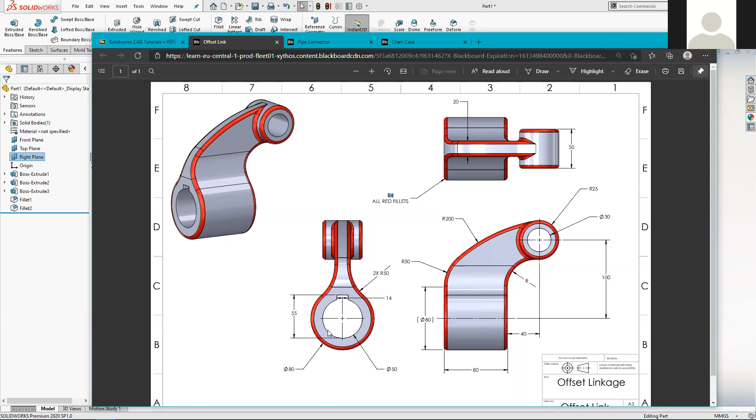So there's one last feature to put in, and it's that keyway cut that we saw on the drawing. It's that little cut there that is 14 wide, and then it has this kind of reference dimension that references the edge of the circle. I'm sure we used the dimensioning tool the other week to, oh, maybe we didn't. Maybe I'm thinking of another group, but we'll tackle that in a second.

So we're going to create this shape as an extruded cut. Let's do that now. So extruded cut is what we want to create. Now I've made a mistake there. I had the right plane selected already when I clicked on extruded cut, so it's assuming that I want to create the extruded cut sketch on the right plane, and I don't. So I'm just going to quit out of there. But if you ever do something similar like that, you can just cancel it.

So I'm going to make sure I've got no faces selected. I'm clicking in empty space over here. Now I'm going to click on extruded cut. Then it's going to ask me for a face or a plane to sketch on. I'm going to select that face there.

And then I know I want sort of a rectangular shape for this cut, and I kind of know I want to center it about that plane there, about the right plane. So it's a good bet that the center rectangle will be the most suitable, because that allows you to place the center of the actual rectangle itself. Whereas the other common one, which is corner to corner, I would have to do a bit of extra work to get that to lock itself into perfectly central around that plane.

So center rectangle, drop the center point somewhere on that vertical plane there. That will do for the time being. Drag it into sort of approximate position, so it's going to cut some material. About there will be fine for the time being.

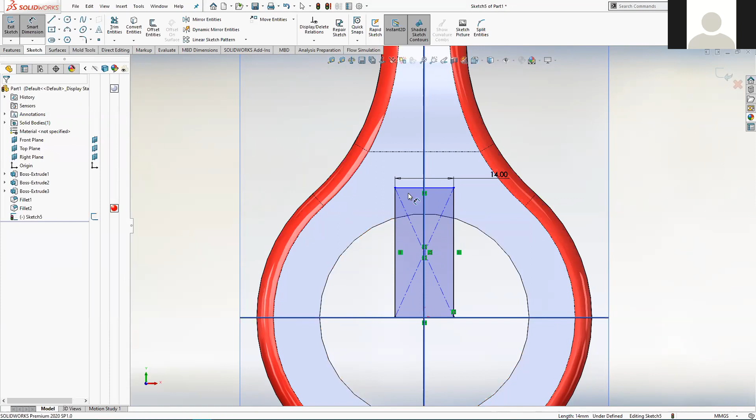I'm going to get the Smart Dimension tool, dimension the width of it, which is 14. And then there's only one thing left to dimension, which is the position of that top edge vertically. So again, I'm going to get the Smart Dimension tool, and this time I'm going to click on that horizontal edge, and I want to dimension it down to the lowest extent of this circular inner face. But if I just click on that face, it dimensions relative to the center point of that circular face. So that's not what I want. So I'm going to press escape once to cancel that. I've still got that top edge selected, you can see.

So if I hold down the Shift key before I click on the edge of that circle, then you can see there, it allows me to dimension relative to the furthermost extent of that circle. Rather than trying to attach that dimension to the center point, it allows me to dimension to the edge of a circle, or it works with the edge of an arc as well. So that's how you make it change its behavior when it's dimensioning relative to a circular feature or a circular edge. So we want 55 for that, as it is in the drawing.

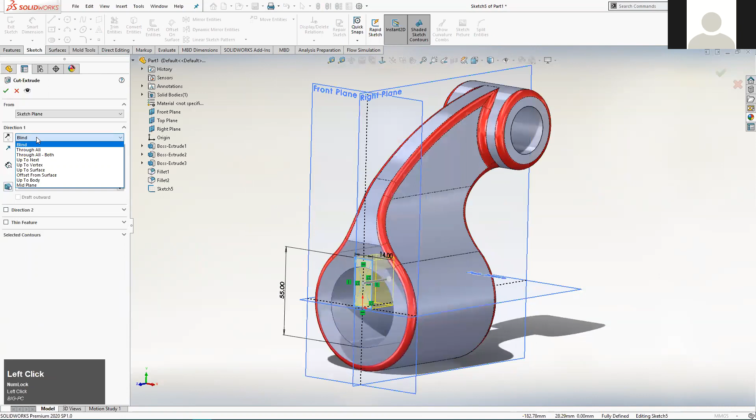And then we should be okay. Yeah, we've got a closed boundary. It's definitely fully defined. It's reading as such down there. So click to OK the sketch. And then I think just in this case, just because we don't use it that much, we'll use the through all option. It is a crude way of achieving what we need, but we'll use it. So click on the green tick, deselect everything just by clicking in some empty space there, and yeah, that looks okay. So that's the part complete.

And just before we save that, if your system is showing the edges of these fillet features not with a dashed font like mine is, if yours are solid, don't worry about that. It's just a system option.

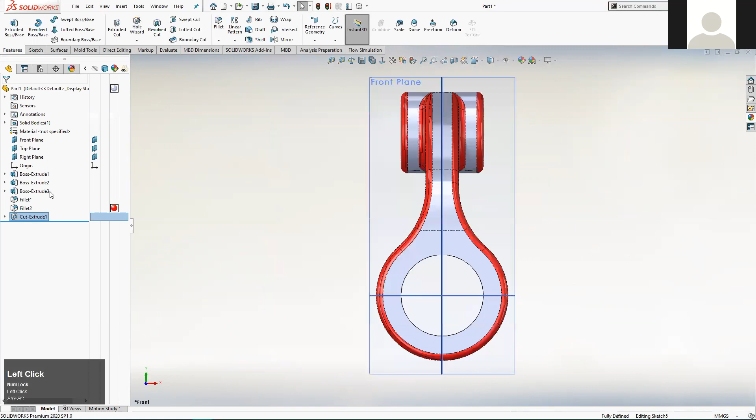I was doing another tutorial in the week. How did I dimension it to the edge of the circle? Yeah, that always trips people up. Let me go back into that sketch and I'll do it again. So let me delete my dimension, drag it out of position a little bit, and then Smart Dimension tool, and then click on the horizontal edge first, and then before you click on the edge of the circle, hold down the Shift key, and then click on the edge of the circle with the Shift key held, and it will allow you to go to the edge of the circle rather than just default to the center point of the circle itself. Did that sort that out? Yeah, it looks like you're okay now.

And then obviously OK the sketch, and we set that feature as through all, so it'll just cut through everything that it encounters. So if you're seeing solid edges to your tangent points there, basically that fillet's being created, and when the fillet ends and it runs into that vertical face, there's a tangency relation between the two. That's how fillets work in the system. The fillet always ends tangent to the face that it borders. And I've just got my system set up so that whenever there's a tangency transition between two faces, it uses this dashed font to represent that.

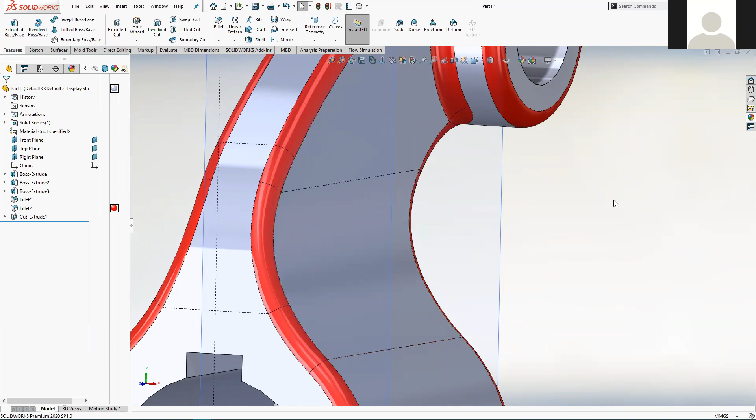But yours might be showing them as solid, but don't worry about that. I'll show you how to change it later on, but it's nothing major. You don't have to worry about it. So I think we'll save that now. So you want to click on the save icon at the top there. So I'll hover over that for a second. Click on save. You want to give it a sensible name.

So given the drawing that we're going to create is called offset link, so that's the part name. And then the slightly more descriptive name is offset linkage. But yeah, just call it offset link. So you just want to type that in there. Now, if I save mine, it'll shout at me and say, you've already got one of these already. Do you want to overwrite it? And I'll just click on yes. So we've created that part.

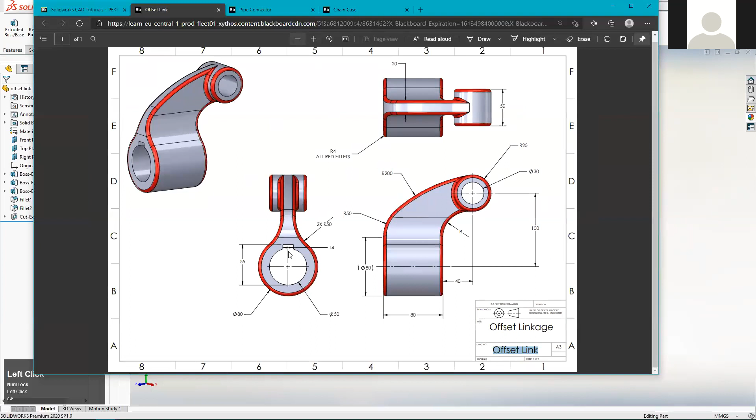And what do we want to do now? We want to start the creation process of the actual drawing itself. So ultimately, we want to try and replicate that as near as we can. So if you're looking at a part currently on your screen at any point, not just now, and you want to create a drawing of that particular part, the easiest way of doing that is just to go into the file menu, and you can see there's an option there that says make drawing from part. And that just takes the one that you've currently got open and begins the drawing creation process using that.

I think when we briefly looked at drawings the other week, I kind of made you shut the part down first so that you know how to do it kind of the long way. And this would be the way if you'd done previous work on a different day, and then you'd shut the system down, and then you'd come in thinking, right, I'm going to create some drawings. You wouldn't have to load the part up first. You'd just jump straight into creating a drawing, and then the drawing dialog would ask you, where's the part that you want to create this drawing of?

So let's do it that way for this one, and then for the next drawing we'll do it the slightly easier way. So make sure the part's shut down. Tell the system you want to create a new file, just like we did when we were creating that part. This time we want to create a drawing, so double click on drawing. We should be confronted by the system-wide list of drawing formats that are stored within the SolidWorks installation.

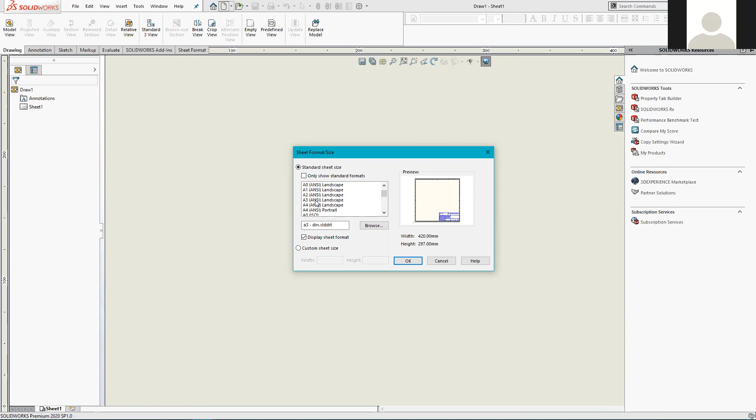And I think the nearest basis that we can get out of the default drawing formats within SolidWorks for our final drawing style here with this title box is ANSI A3. We could possibly use DIN A3 as well. But yeah, I believe my basis for that one that we're working to is ANSI A3. So select that, click on OK, and the system will go away and create the sheet for you. But currently it's empty. Is there a specific style we should use for our assignment?

It's been said that a good basis is to look at the, is it 888 or quadruple 8 standard? I forget, the international drawing standard. I'm sure the British standard's been harmonized with that. So they're kind of the same. But yeah, do a little bit of reading in terms of that standard, but I'm not going to be too harsh on that, on the marking of the assignment. My watchwords are clear and concise and non-ambiguous for your drawings.

So as long as they're clear, as long as there's no bits of your designs that are just left open to interpretation, so you've been concise, and as long as they're unambiguous. And what I mean by that is there's no room for interpretation of them. You've fully documented the form and shape and tolerances and everything about your parts. I'm not going to hold you to a particular standard. But yeah, it's probably worth reading about it. I'm sure it's 888. It's been so long since I've actually read the standard paper. But I assume, can you use the library online service for getting standards? Do you know how to do that?

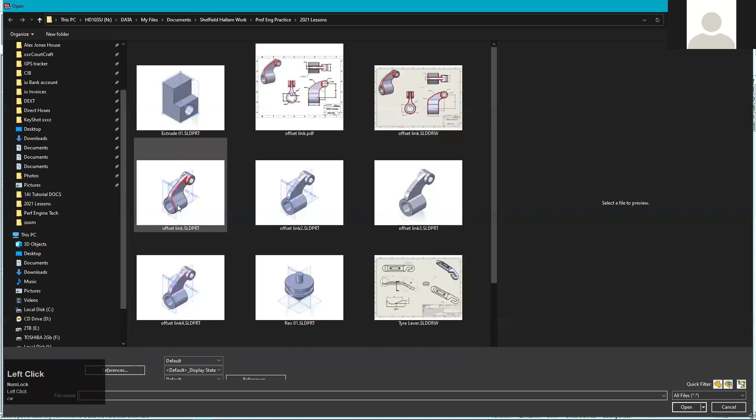So what is the system asking us? It's saying you don't currently have a part loaded up unless you've left your part open in the background. But I told you to shut it down so that we're all looking at the same thing. So it's saying there's no parts open in the background in SolidWorks. Can you browse the hard disk and find the part that you want to create a drawing of? So I'll click on browse. Then I should drop into the correct folder, but if not, you might have to find the correct folder on your machine. There's my part, offset link. So I'm going to open that up.

And then what the system does is it auto accepts that. So I've just gone back one menu now just to show you. It's accepted that, and it rolls you on into the next menu. So it automatically clicks that next button, takes you into the next menu, which is where we begin to lay out our views.

So let's just have a quick look at our reference material again. There's a decision to be made here in the same way that we had to make decisions when we were modeling this part as to how we were going to approach it. Looking at these views, this view is totally independent. It's not a projection of any other view; it's just been placed on the sheet and set its viewpoint relative to the part, totally independent of these other three views. So we'll keep that in mind. That one is not related to any of these other views, other than it's of the same part. But in terms of its orientation, it's not related.

These three views I will term your typical tri-view layout of a part. And they're all projections of another view, essentially. But what you have to try and decide is which view is it most sensible to put in first.

And I would say it's this one, because that view there can be regarded as a projection of this view, but looking down from above. So that gets projected upwards that way. And that view there, again, can be regarded as a projection of this view. So I would say this is kind of the first view that we want to put down on our sheet. And then we'll project upwards and create that one, and project to the left and create this one.

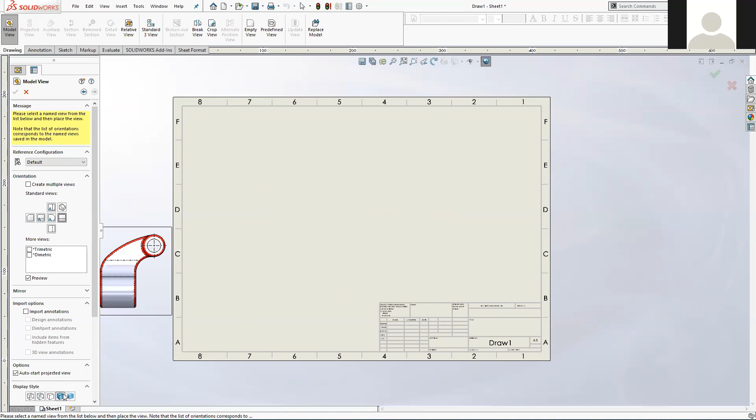So you can see when we were playing around with these display styles, when we were creating the part itself, the same icons apply to these drawing views. So you can see I was on one that's known as hidden lines removed, which was that one. That's what it defaults to with drawings. But in this instance, I want to change it to shaded with edges, like that. And then I'm going to click on the sheet to drop that view.

And then I'm going to create the two projections of this view. And the way that you do that is just move your pointer away from what we're going to term the parent view. So move your pointer away from it, and whichever direction you move in, you get another projected view away from the original. So you can see you even get sort of 3D, isometric kind of views as well. But we want that one up there and that one over to the left as well. And then we don't want to project any more views, so I'm going to hit the escape key to get out of that automatic view projection behavior.

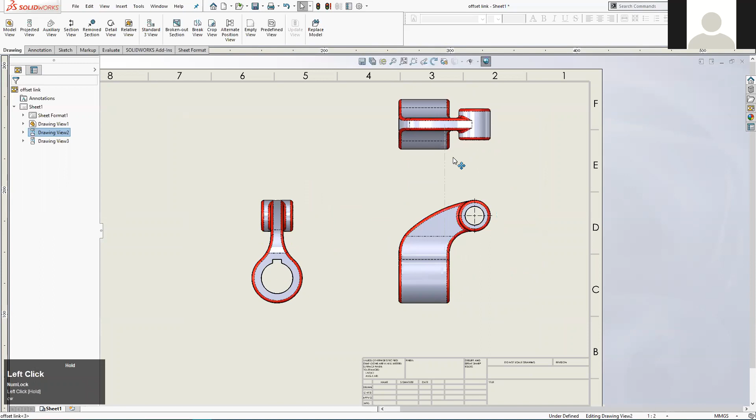And then what I'd probably do is just reposition these a little bit, just to make their positions a bit more sensible. And then I think we'll place the 3D one next. So we'll get all the views laid down first. And then we might mess around with the sheet scale, because I suspect the sheet scale is slightly wrong for us. And then we'll start applying some actual annotations and dimensions to the views themselves.

So, because I've still got one of these views selected. Actually, it was this one over here. What I'm seeing on the left-hand side of the screen here is all the options related to the setup of that view. So you can see that view's selected, and it's designated as being selected by the fact that it's highlighted in blue. So the little dashed rectangle that's around it is selected. If I select the parent view here by clicking on the dashed rectangle around that, that one highlights in blue. And then same with that one as well. And so I have all the options there to modify that view, but I don't currently want to do that.

I want to add a fourth view up here, which is a more sort of 3D style one. So I want to hit escape, so I haven't currently got any view selected. And in the first tab at the top there, which yours may be called Drawing, or it may on your installation of SolidWorks be called something else. I think it might be called View Layout, but it does the same thing. And if you click on it, you should be seeing more or less the same icons displayed as I can see there. So one of the icons should say Model View on it. And that's what we want to lay down.

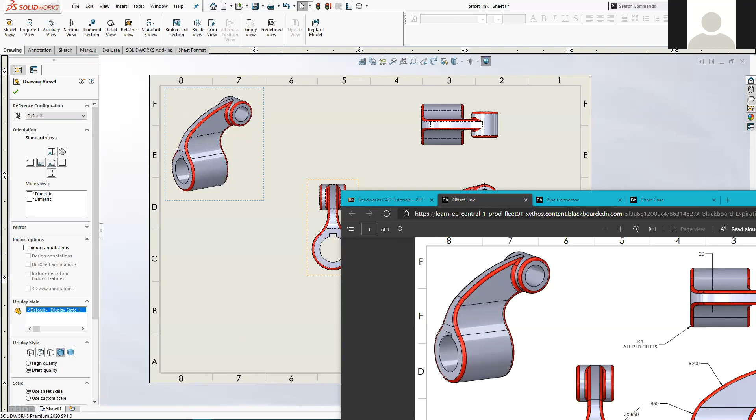So the next thing that we're going to address is that I suspect the default sheet scale on this reference image is different to the sheet scale on our sheet. And we can just ascertain that by looking at the title block. Default sheet scale is 2:3 as a ratio. So let's check and see what ours is.

So 1:2. Yeah, it's different. So let's set the default scale for the entire sheet now.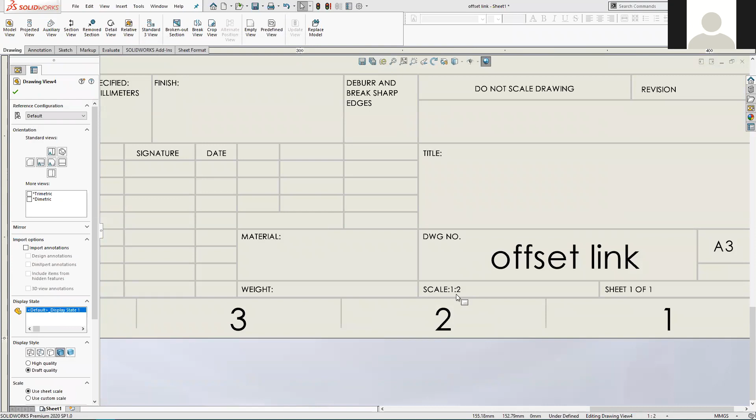Now you can do this per view. We could manually go in and edit the scale of this view and this view, but that's the long-winded way. That's not the way to do it unless you specifically want a view which doesn't follow the sheet scale, because that would make the label here confusing for the person reading this drawing—they'd say well, the default scale says 1 to 2, but all these views have been scaled differently. So that's not the way to do this.

The way to do it is over on the left-hand side here. If you want to make a sheet-wide change to the drawing, you want to edit the properties of the sheet itself. You can see all our drawing views are listed here—all 4 that we've created so far, listed in the order we created them. Then there's an option related to the sheet format itself, the ANSI A3 sheet with its border and title block. Above all those, at a higher level, is the sheet itself—so the sheet is the highest kind of feature, and everything else is a sub-feature of that.

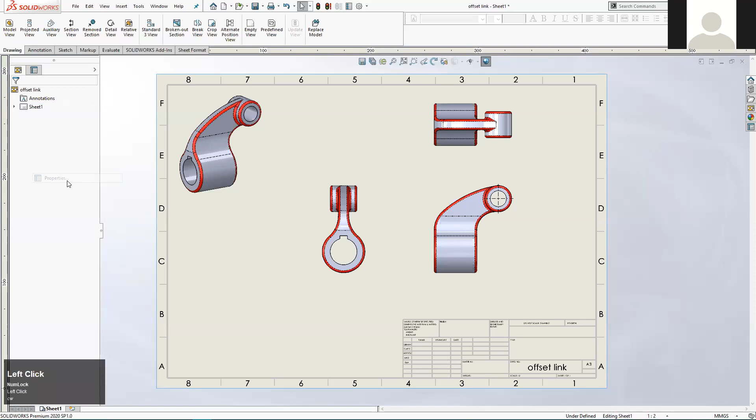So we want to make a sheet-wide change. We just right-click on the sheet, go down to Properties, click on Properties, and there you go. That's all the setup for the actual sheet itself. And we want to change the scale to 2 to 3.

Another good thing to check while you're in here is that the projection type is correct as well. Because as I projected upwards away from this initial view, I got the view which is arguably looking down on top of the part, as we've named the directions. So I'm looking down from above, and when I project in this direction, I'm looking inwards from this side of the part. The reason for that is that my system is set for third angle projection.

What I'm going to do now temporarily is switch it to first angle and see what effect that has. So switch it to first angle, apply—and you can see the projections are now looking from the opposite side of the part. For our purposes, all our drawings are going to be set as third angle.

So I'm going to go in and change that back. I'll press Escape to deselect everything, go back into the sheet Properties, set it all back to third angle. You can see also, if at any point you want to change the sheet size itself, or the format of the border and title block, you've got all those sheet formats available in here. I could change to a different sheet format at any point and just apply those changes. But I'm not going to—I still want the ANSI A3 landscape for this one.

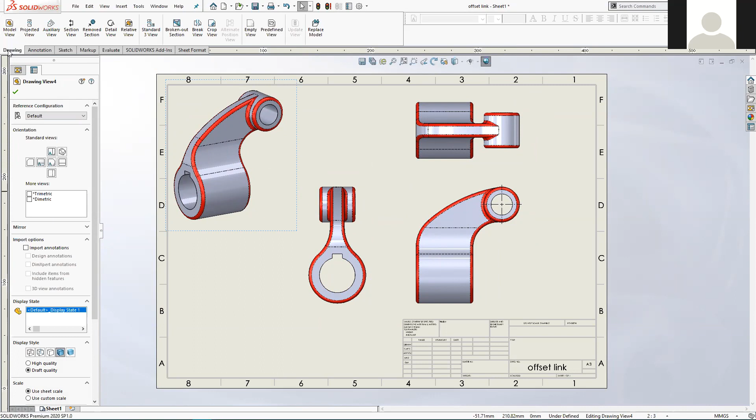Right, so we've put all the views in. Now I think we'll add some annotations to these. Generally, regardless of whether the first tab on your installation of SolidWorks is called Drawing—I know some people's is named slightly differently—the first tab is essentially related to placing new views in a drawing. There are various different types of view we'll look at in later drawings: section views, detail views, crop views, views with breaks in them. If you're doing a drawing of something incredibly thin but incredibly long that doesn't change in its center section, you can put in what's known as a break view.

So these are related to creating views, and the next tab along, annotations, is what it says—it's related to putting annotations onto existing views or into the sheet. So annotations are dimensions, written notes, balloons on assembly drawings, surface finishes. You can see all the different options here.

Center lines and center marks we're going to use quite a lot as well. Generally, you lay some views out, then you'll move on to annotating them, and maybe you'll go back and put some more views in.

As we were creating the sketches for this part, we were kind of smart in the way we did that. Virtually all the sketches we stuck to dimensioning in the same way the drawing was laid out. That's why we made a concerted effort to get that dimension reading as a radius rather than a diameter. Thinking forward, the reason was that we can then use the import option within the drawing. We don't have to lay out all these dimensions again in the drawing - we can just import them from the sketches within the part itself. So that's what we're going to do.

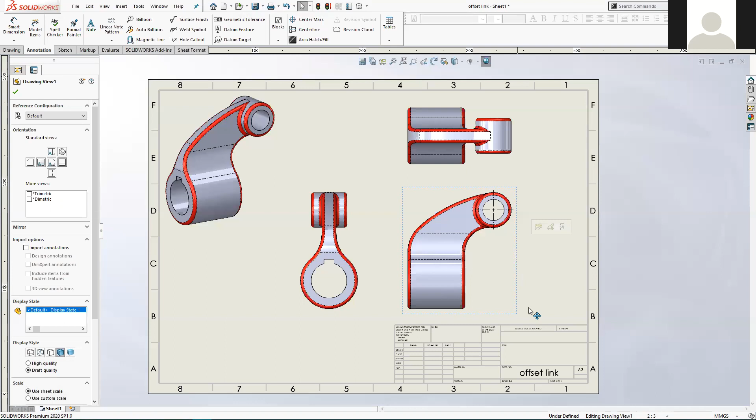It sounds like yours may be set up like that. If you zoom in and just check that your sheet is on 2:3, that would be the first thing, so we know what we're working with. I'll try to emulate what you're seeing on your system. If I select this parent view here, and go over to the left, mine's using sheet scale, but you can not use sheet scale and set it to a different scale. So that should have answered that question. Now these three views are ignoring the sheet scale, which is set to 2:3.

The other thing is, because this is the parent view, when I change this, the default is that the child views follow the parent. But again, I can override that behavior. If I want to pick one of the child views, that one there, the projections, I don't have to let it use its parent scale - I could set it as a custom scale if I wanted. So let's have that at 1:1. You can see you've got full control over that. But the default tends to be that you will use the sheet scale unless there's a good reason not to.

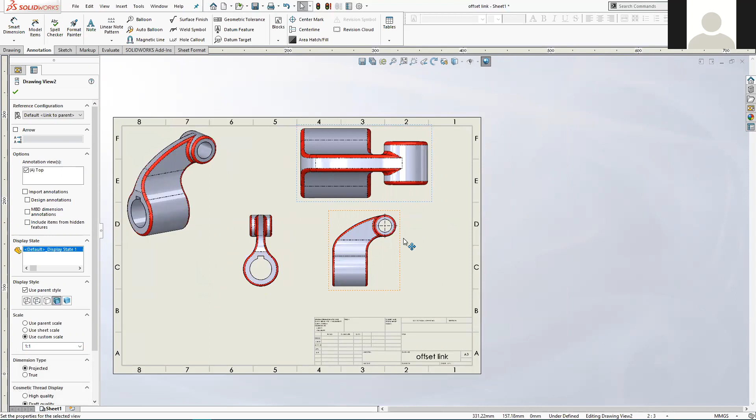If you create a detailed view, obviously the detailed view is an enlargement, so that's going to be set to a different scale. But let me set mine all back to use the sheet scale again. So, use sheet scale - there we go, we're back as we need it.

Back in annotations - there are two ways to put dimensions on your views. The way we're going to use now is to import them from the actual model itself, from the 3D model part we've created. The other way is to use smart dimensions, which behave exactly the same as when you put them in sketches, except in a drawing you don't get the option of editing the actual value. All the system does is report back to you what that value is on the arc or the line or the distance between two edges or whatever you dimension - it just reports what that value is in the part. But we'll look at smart dimension in a little while.

The first thing we're going to do is the import method - we're going to import model items, which come from the model itself. If you click on the icon that says model items, I think we'll tackle these views one at a time - we'll tackle the main one, the parent view, first. Because I already had that view selected from messing around with the scale, the system accepted drawing view 1 and entered it into this box. Now you may not have had that selected, so that box might be empty, or you may have that ticked, which tells the system to bring the dimensions into every single view you're looking at. But as I've already said, we're going to tackle these one view at a time.

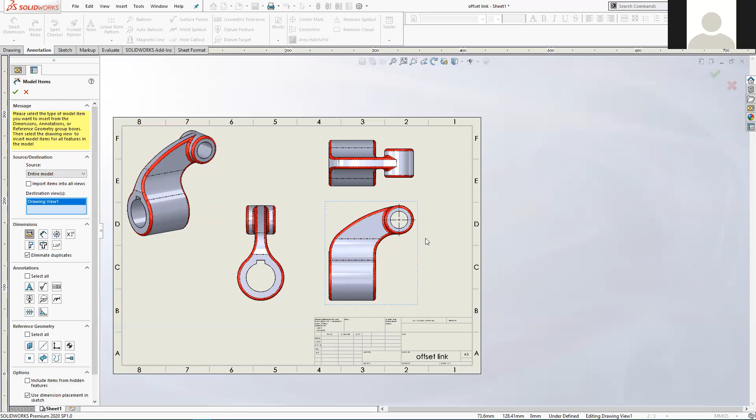So at that point I should be able to tick at the top of this menu, and I'll get an import like that. Now we've ended up with too many, we don't want all these on this view. What we'll have to do now is just go through and delete the ones we don't need, and maybe adjust the position slightly of the ones we do want to keep. So you can click and drag these around and keep the ones you want and get rid of the ones you don't want.

So again, I'm using this view here as my reference, just dragging them into those approximate positions. That radius 4 down there I don't need, so any that you don't need, just click on them and press the delete key. It's pretty quick in terms of a method to actually get these set up, so if you just want to copy what I'm doing here. Yep, that one's okay, drag that one down a little bit. I think we've got them all for that view.

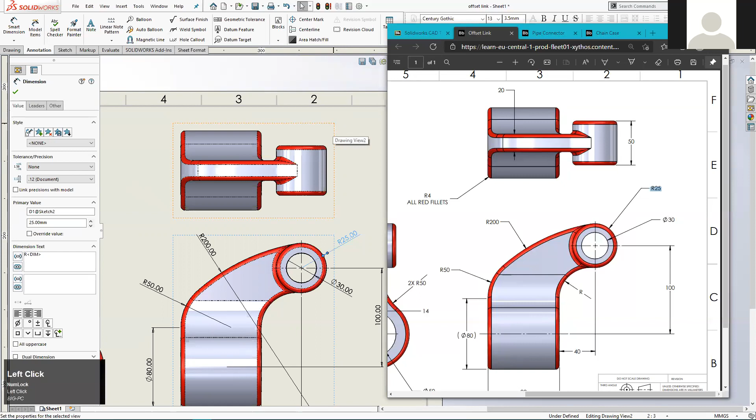So let's tackle this top view next. In this case I am going to pre-select this view, so I want to click on the box around the view to select it. I've pre-selected it before I launch the import option again, the model items icon at the top. So click on model items, now it should have accepted that view. Because I pre-selected it, it assumed that what I meant was I want to import these model items into a specific view, and that view. So we're happy about that.

What do I want to bring them from? Entire model is still okay. Do I want to import them into all views? No, I don't. I want to import them into that specific view too. This is an important option: eliminate duplicates. So what that means is any dimensions that I already have on another view, don't import those this time. So gradually we're making our job a little bit easier by not replicating dimensions that we've already got.

So click on import, see what we get. Yep, that looks good. And we only want to keep a few on this view. So we want the 50, we want the 20, we don't want the radius down there. Do we want that one? No, we don't want that one. So yeah, that's essentially what we want on that view. We will come in, as I say, and edit these a little bit. So we might drag the positions a little bit further once we apply that drafting standard to make them look a little bit more like the reference image.

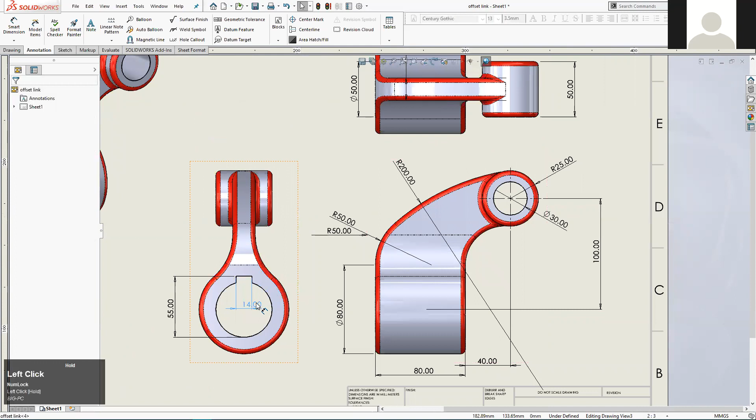So we don't need the 4 there. We do want the 14, although it's a tricky one to place to make it legible. I think that's about as good as we can do. And we do want the 55. So there's one final one in here. It didn't really do a decent import on this view. So I'm clicking on this view at the top now of the radius of that fillet there. So what I'm talking about on our reference image is this annotation there.

Now I may try that again, doing import model items again and seeing what version of that fillet it imports. But probably an easier way of doing that is to just use the Smart Dimension tool now. So this is the alternative method for adding dimensions to your drawings. If possible, I would try and use the model items method that we've just used for these views. But in some cases, or in the case of some features, it's problematic, or maybe the way that you drew the feature isn't necessarily the way that you want to dimension the drawing.

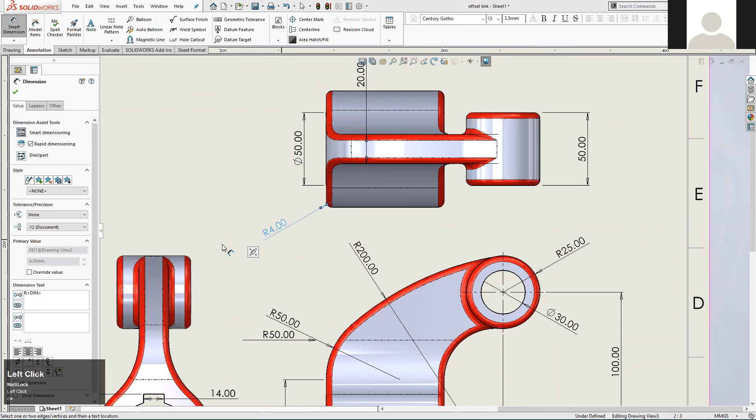That's often the case. The way that it's easiest to model a feature can differ from the way that you would like to lay the drawing out, the way that you would like to define the size and shape of something on a drawing. So in this case, we're going to use the Smart Dimension tool, which is the alternative method. And I'm just going to click on that little arc there and see if it agrees to place this dimension, and it does. So this is the other method. You can just use the Smart Dimension tool in the same way that you use it in a sketch. So let's say I'd not put that 50 in there. I could just, with the Smart Dimension tool active, click on the 2 edges that I required.

Now you may be noticing that all these smart dimensions that I'm entering, the system is colouring them a slightly grayer colour than the imported model item ones. Now, again, that's the default behavior of SolidWorks. It's trying to communicate something to me, the SolidWorks user, and it's basically saying, in the same way that you can have driven and driving dimensions in a part itself, you can also have them in a drawing. So this is regarded as a driving dimension, which is why it's coloured in black.

But these ones that I've just added are just there to report what that size happens to be. I can't affect them. I can't go in and edit that value. Whereas a nice offshoot of importing these dimensions is that you can actually edit them even from a drawing.

And the drawing will update eventually. There you go. So that's what's known as a bi-directional link. When you import the actual dimensions direct from the features out of the model, like we did with all these dimensions that are coloured in black, you, the user, have the ability to edit the part from within the drawing itself.

It's in options again, which I think we played with the other week when we were setting up how our sketches rotated round to be normal to the sketch. So if you go into options, there's a system option to do with colours. And if you go down this list until you see dimensions, you have got driving there, which are the imported ones, which are in black, and non-imported, which are driven, which are currently coloured in light grey.

But if I wanted to force them to be black, and I didn't want that information as to whether they're imported or not, there you go. So you've got the ability to change them if you really need to. And if you're saving out PDFs, sometimes it's nice to have them all coloured in black. That's how you would achieve that. You go in there, dimensions, driven and driving, and you just set the colours of each one to whatever you require. But I'm going to set mine back so I get that distinction between the two. I get that extra information.

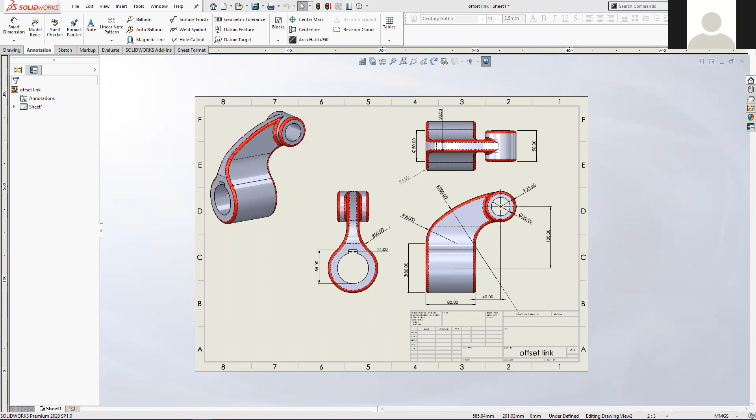Someone's just asked, when you change those options, does it remain as the new default? I believe it does. As long as you're using your own installation of SolidWorks, it should keep that as the default option. That's either a good thing or a bad thing, but it should keep it. As long as you're not using the virtual Windows login version of SolidWorks that some people were having to use because they couldn't install SolidWorks themselves.